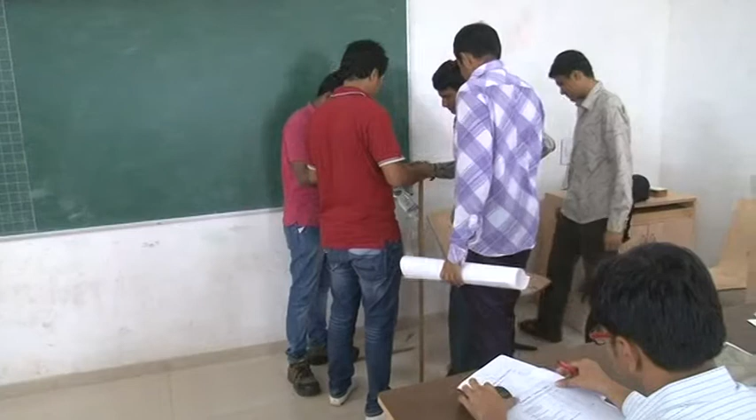Okay, are you ready? Ready, sir?

At a certain point in your presentation, there will be a chance for the audience to ask clarifying questions, if they are not clear on how you are communicating. For the audience, you need to listen carefully and think about how to ask clarifying questions. If something is not clear, you should be ready to ask. In design terms, this is called a critique, and there are certain rules about critiquing.

You cannot just be kind to people because they have spent a lot of time and effort - ask them questions that are meaningful. If you see a problem, ask them if they have thought about X, Y, and Z, or ask them to clarify whether this can be used in mud or not. Be kind, but also critique. You cannot say this is a rubbish product or a rubbish shed - that's not allowed. Whatever you say should be helpful for these people to develop their ideas further. It's a joint effort to make the product better.

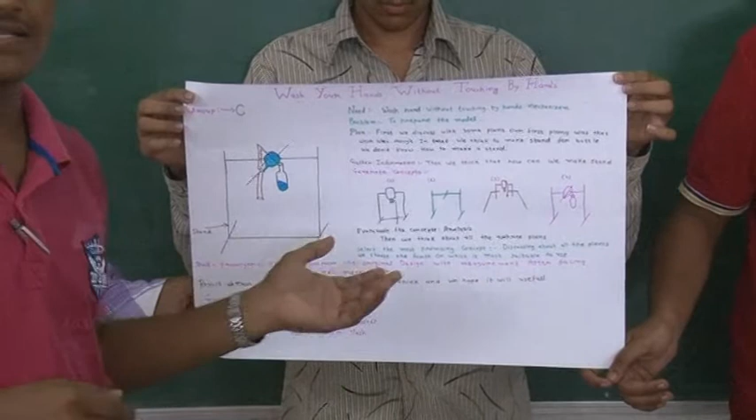First of all, we made this plan and these whole things. We drew roughly this, but we didn't know how to make the stand, etc. But after making some plans and discussing about these plans, we chose this one. We think this is appropriate for this problem, that's why we chose this.

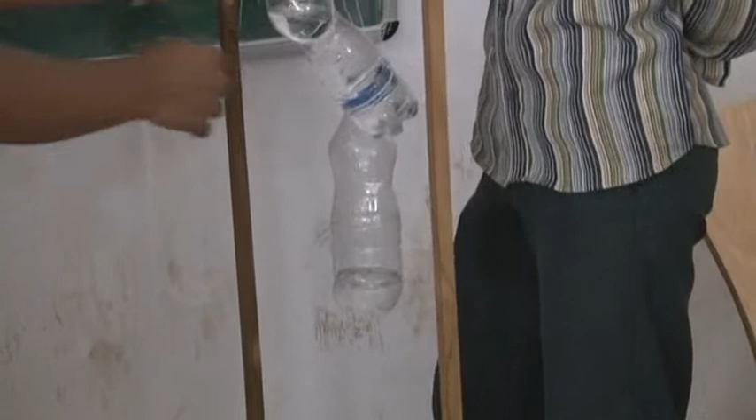If we move this, then it will be like this. Yes, this.

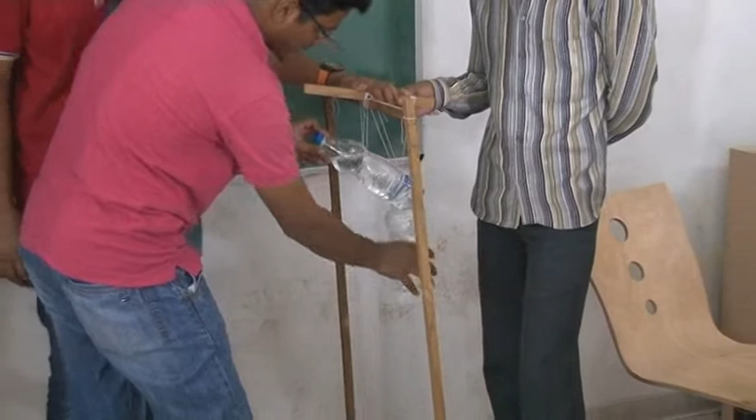And for support, to move this bottle, we put this bottle here, which is tied with it.

We made it with more effort, but because of these bottles and only threads, we couldn't make it very clear. If we use some pins and other things, then we can make it very clear, and we think it is really useful.

I think now it's time for questions. If you have one, is there any question? If you have any questions for the team, you can ask it now.

Even faculty can ask. Yeah, there is one question here.

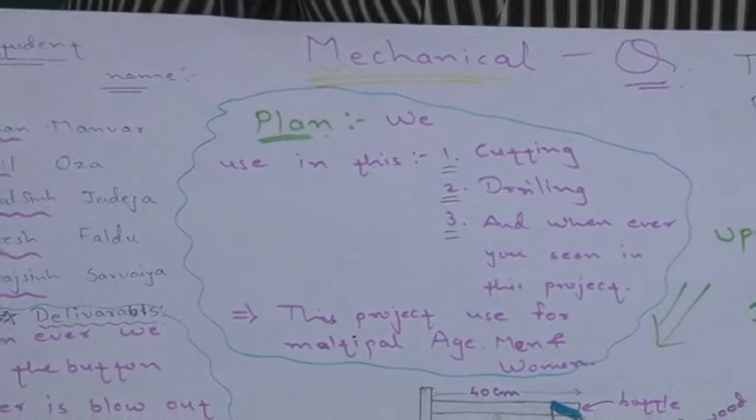Hello friends, good afternoon. We make a multiple use of wash basin, and this project is used for children and men and women. We made this project according to age, for anyone who applies it or uses it.

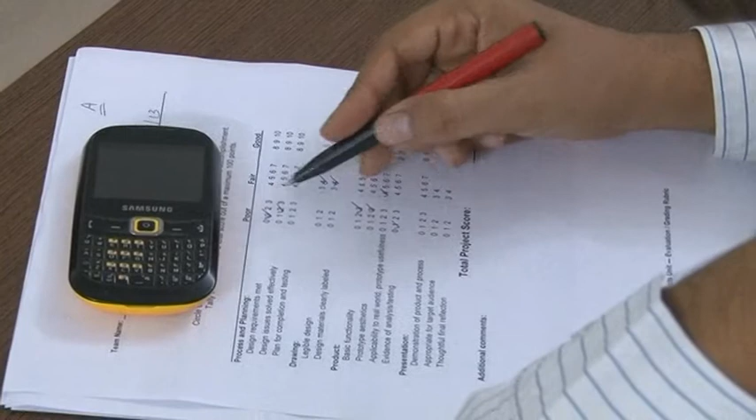हमने ब्लॉक कौन सा मटेरियल से बनेगा? हमने अभी जो ऊँट से ही बनाया था वो अच्छा है हमारे पास इसीलिए, नहीं तो ये ऊँट से बनेगा। ठीक है, हमारे वो में है? हाँ सर, हमारे पास वो कोई मटेरियल नहीं था इसलिए हमने।

ओके, इधर स्प्रिंग होगा, इधर थंब स्प्रिंग होगा। फिर ऑटोमेटिक पानी का फ्लो हम जब यहाँ से फोर्स ले लेंगे तो ऑटोमेटिक बोतल से वापस डिपॉजिट होगा। ये खड़ा कैसे रहेगा?

यहाँ पे ये सबसे ज्यादा मटेरियल था आपके पास? पर टाइम नहीं था, और हमने यहाँ पे जो हाइट ज्यादा है इसलिए इसको मेंटेन कर लेंगे कि इधर ज्यादा स्ट्रेंथ से स्टैंड होता है बैलेंस कर सके, काउंट बैलेंस करेंगे। ओके, तो ड्राइंग में है।

हाँ यस, वो एक साइड में आपने 35 दिया है, एक साइड में 35 दिया है। ये दोनों 40 सेंटीमीटर की और ये 140 सेंटीमीटर की। ओके, हमने पूरा कैलकुलेशन करके पूरा सेंटीमीटर का इसका।

तो ये इम्पोर्टेंट किसके लिए है? सर ये बड़े लोगों के लिए और ये छोटे लोगों के लिए, और ये सिस्टम इधर भी होगी। आपने हमें बोला था ना यार। ओके ठीक है, ओके मल्टीपल दोनों के लिए।

Right. Finish. Any queries? Any questions?

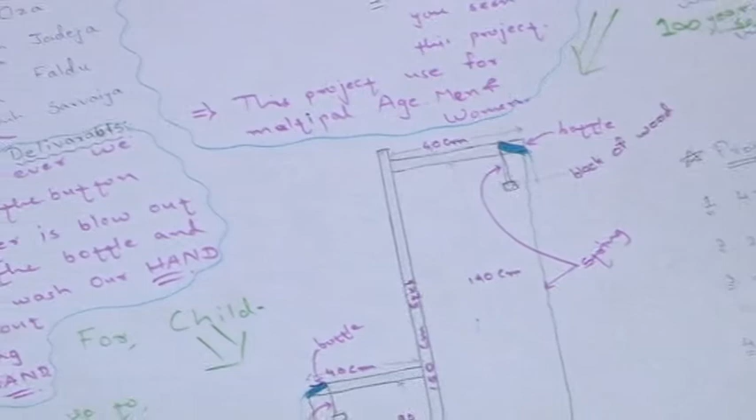The other aspect is that you have not been able to finish that project. For engineers, timekeeping is something very, very important. If you finish a bridge late, it does have a big problem. The bridge engineers face deadline charges because they can't finish it properly. So we have to be careful with the time.

Use of language, fine with the technical elements, but be careful. You should not use words such as lula and lagda, because it's a derogatory term. It's not a good term to use. I don't know whether it's fine here or not, but culturally in the UK you can't tell somebody that. There are technical words like physically challenged or disabled. So use of such good language is required for engineers at least. Don't use lula and lagda.

Or if somebody is blind, then no, that's not right. You need to say he is physically or visually impaired. So we have to be very careful in use of language.

Okay, that's fine for me, anything else, okay well.

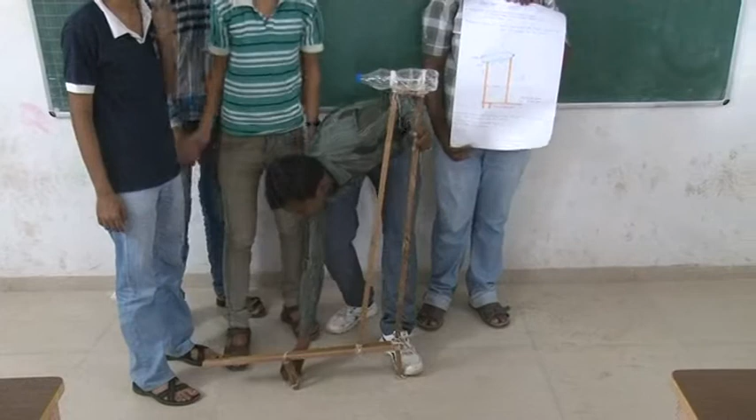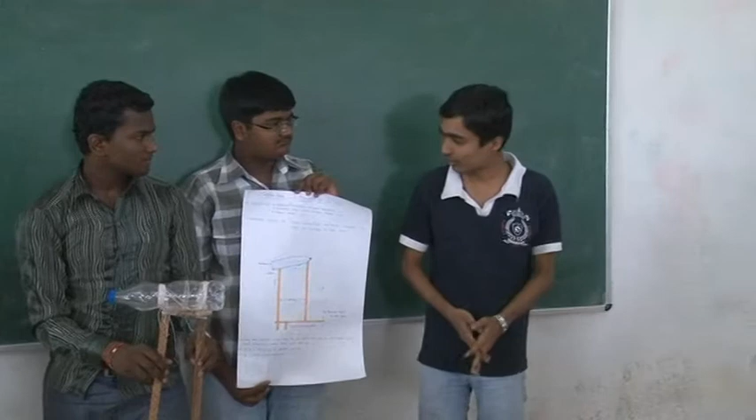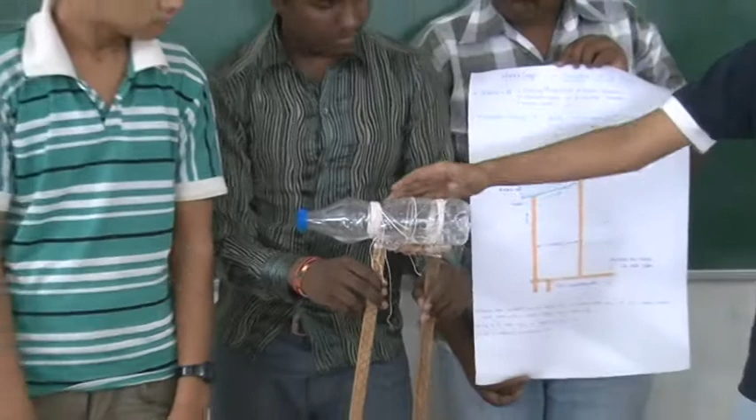Anything more? Okay, any queries, any questions? Go for it.

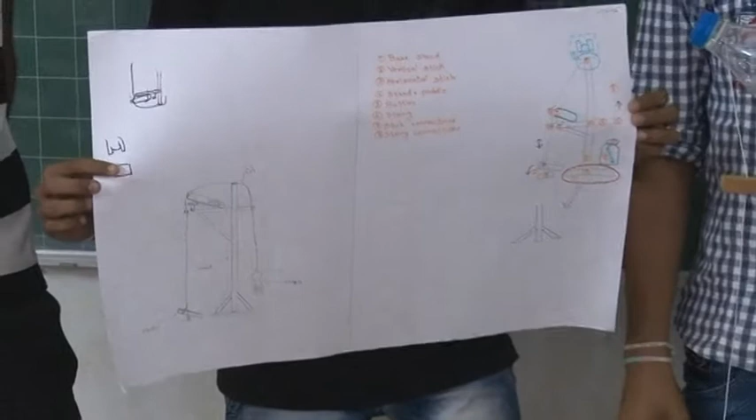First of all, we took the idea from the concept of a dustbin which works by foot. I think you all know about that. We also made such a type of design that works with the pedal. Here is the pedal, and if we push it downwards...

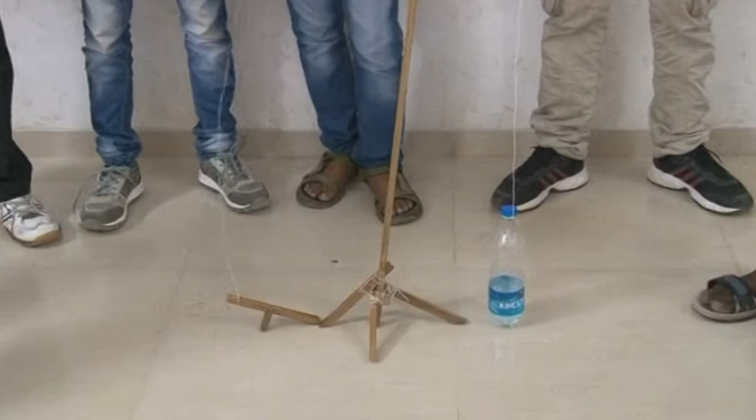You mean that way? Yes. The ability of the person to... Okay, so you think that it should be at a different angle, able to actuate - it's difficult, isn't it? You can't keep your head like there. It's up nice and straight there, you can easily actuate it. That's what you mean, is that right?

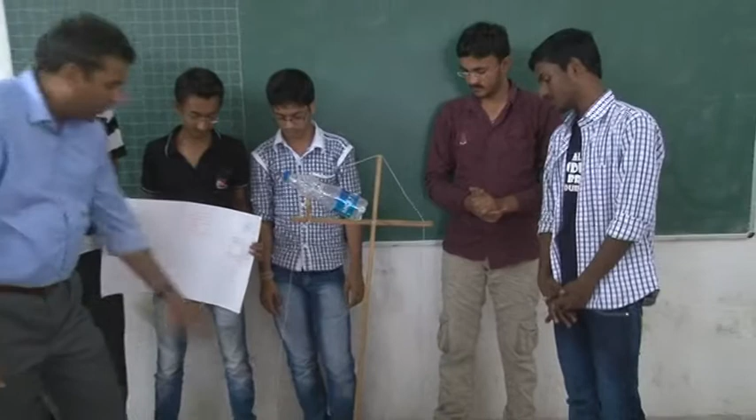Your spring will stop you from actuating it. If it's that way, you have more chances. So thinking about where the fulcrum and the pivot is, where the load is, you need to be thinking about aligning it. Yeah? Okay, that's fine.

So today we are going to present our project. Then talk to them.

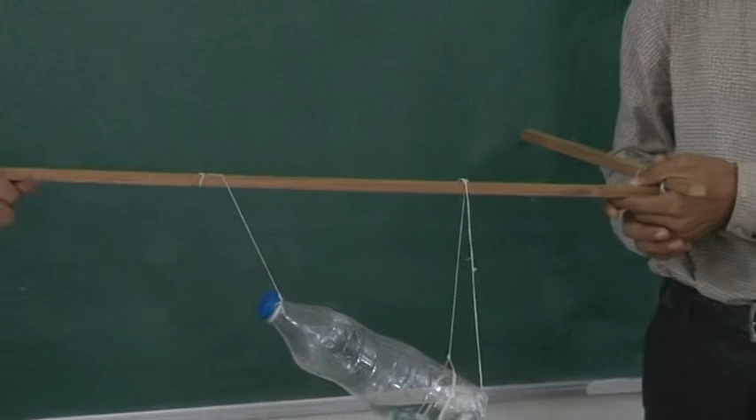Today I am going to present a project about how to wash hands properly. We made this project knowing that our main purpose is how to reduce diseases, how to end causes like that, and some challenges faced in these decades by the science. So I'm introducing this project to all of my friends and faculty present.

I'm going to start explaining how it works. Talk to them, not me. I'm going to represent how it works. If you want to talk in Gujarati and Hindi, that's fine. Don't worry, if you're able to explain more in Gujarati and Hindi, that's fine.

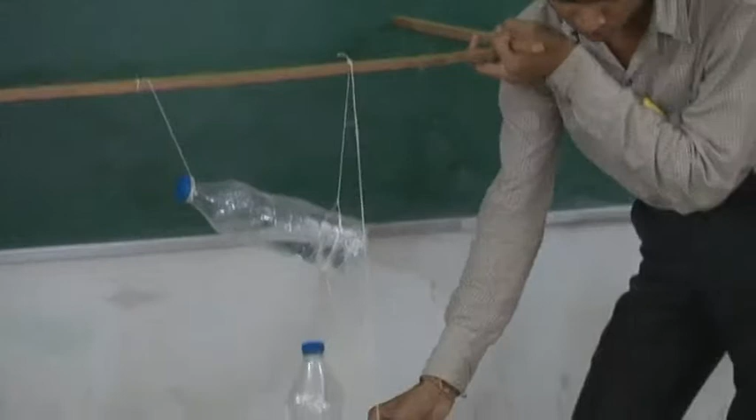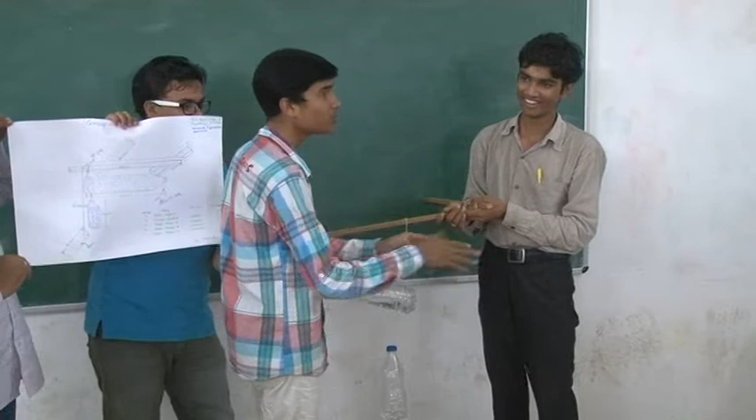Okay, so you will have a contraption which allows you to operate that without use of hands. Okay, that's fine. Okay.